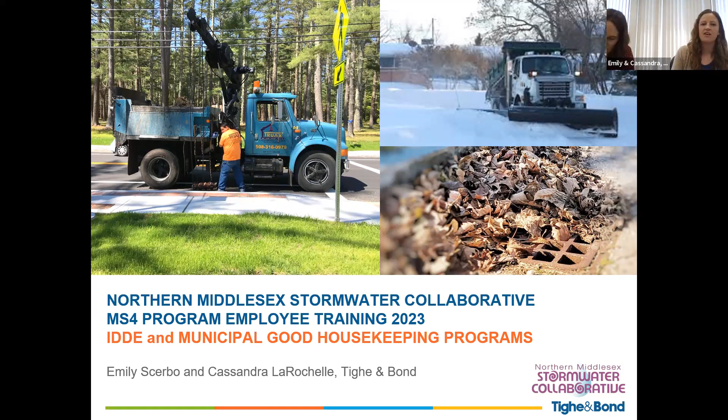Today we will be talking through both the illicit discharge detection and elimination and municipal good housekeeping programs. We want to make sure that you are hitting that permit year 5 annual employee training box as well in the annual report, so please remember to use that sign-in link that Daniela sent in the chat.

Other items we'll be touching on are pollution prevention within municipal good housekeeping and municipal operations, and then we'll be taking a look ahead a few months at the annual report that is due at the end of September this year.

The first few slides, I'm sure you are all familiar with the program at this point, so I'll jump through pretty quickly, but let me know if you have any questions as I go.

As you're aware, the permit is broken out into six minimum control measures, with the added bonus of the TMDLs and impaired water body requirements. Today we will be covering our MCM 3 and 6 training requirement.

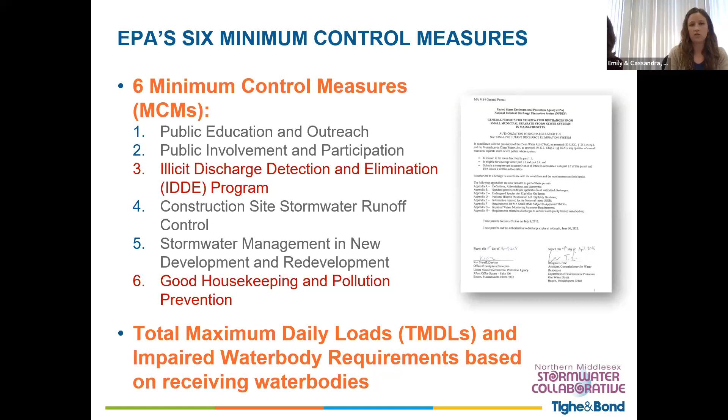To kick us off with the IDDE program, we're going to be talking about how to identify illicit discharges, and some specific examples for catchment investigations and wet weather screening.

To the basics of illicit discharges: really it's anything that discharges to the drainage system, to the MS4, that is not composed entirely of stormwater. There are some indirect discharges that are more overland or via groundwater. There can be piped direct connections, such as actual sewer connections, or laundry, things of that nature.

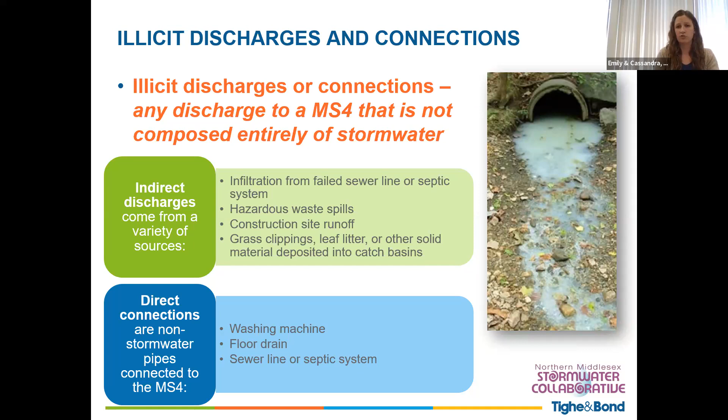The exceptions there are the allowable non-stormwater discharges: flows from firefighting, routine water system operations and maintenance with flushing, dechlorinated swimming pool water, and others listed here.

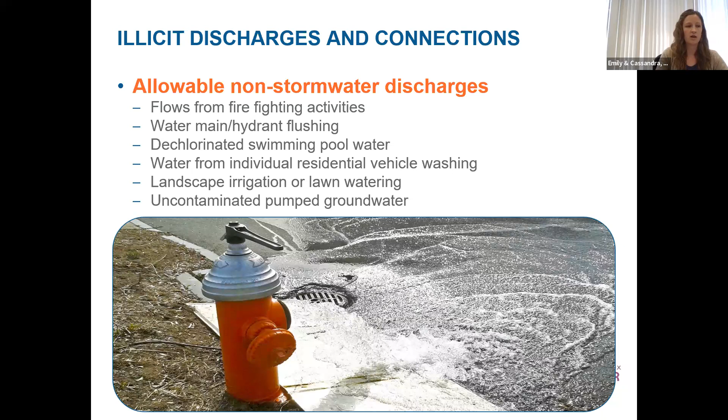What we really want to dig into is, if you're out in the field, what are you seeing, and how are you identifying an illicit discharge or an illicit connection?

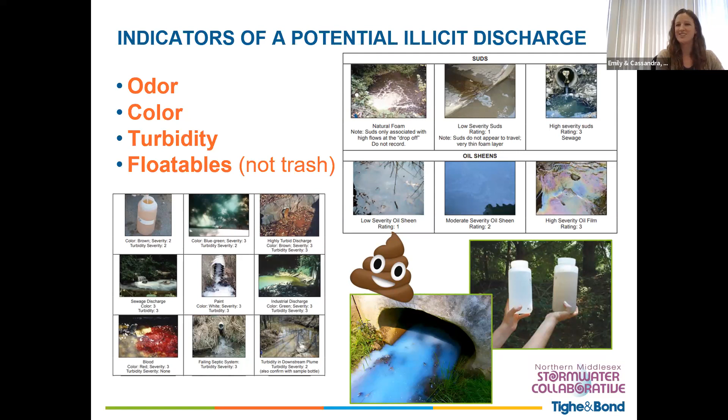Some of the key indicators we're going to be talking about: if there's an odor, it can run the gamut, like a sewer odor or something along those lines. There can be color in the water if it's more turbid, or if there are floatables—and we're not talking about just trash and garbage there. If there's floatables, that's a clear indicator of an illicit discharge in the drainage system.

If you are seeing something that might be an indicator, it should be reported, and depending on the level of risk to public health and safety, there are different methods and ways that you should be reporting this, depending on what the illicit discharge is and the impact it might have.

Reporting is critical. Municipalities can be audited. EPA, even in the annual reports every year, wants to know when the illicit discharge was found, what the response was, when it was eliminated, and how you confirmed that it was truly fixed.

Due to the wide range of illicit discharges, the appropriate authorities—internal in your municipality and external as well—can vary. We didn't want to try to cover every scenario here, but your illicit discharge, your IDDE plan, the written plan, should have a statement of responsibility that outlines the appropriate response procedures for different types of illicit discharges within your community.

So that is our high level overview of the background.

Right now, this is the framework of the illicit discharge detection and elimination program. It follows the framework set out in the general permit. Right now we are nearing the end of permit year 5, and we're in the middle of catchment investigations and mapping updates of your GIS, as well as wet weather screening of outfalls.

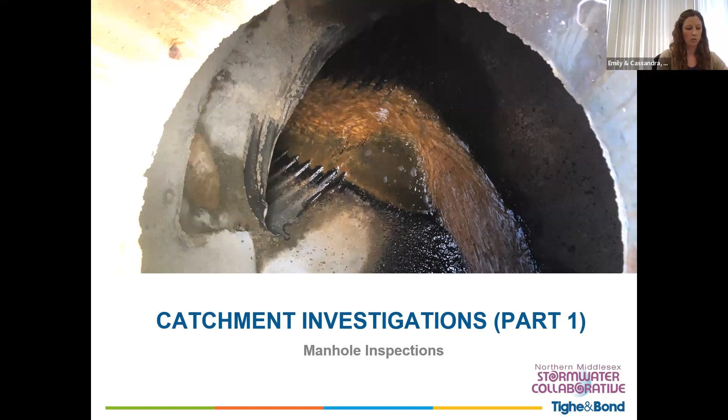To start from the beginning, to define catchment: it's basically the land area that drains to an individual outfall or interconnection. We are making observations, sampling, and looking in drainage structures during dry weather to determine if there is an illicit discharge, to try to basically hunt down the source of that illicit discharge located between two structures, to determine where the illicit connection might be coming from and proceed to eliminate it.

EPA's MS4 requirement is that all catchments with junction structures must be investigated during dry weather, no matter what. So you have to go into the system upstream of the outfall and open key junction structures. I will define junction and key junction shortly. But for catchments that don't have any junction structures—if you have a catch basin that crosses the street and outlets—the dry weather screening effort completed at the outfall does meet that sampling requirement, the manhole inspection requirement.

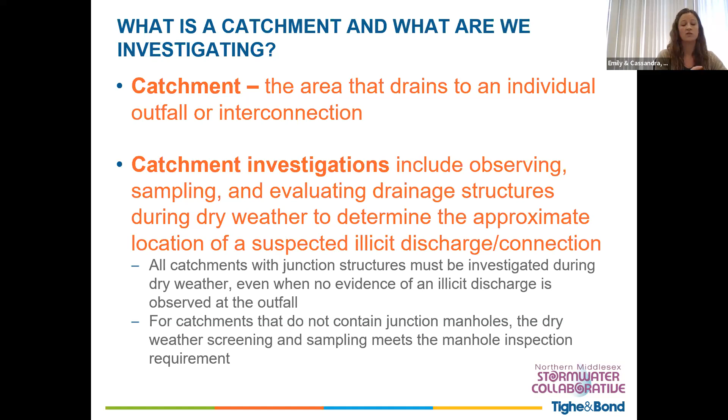Now, as promised, some background on the junction and key junction manhole definitions. Junction manholes are essentially a structure with more than one pipe entering the structure, unless it is from a private storm drain or a single catch basin. In that case, it wouldn't trigger it into being a junction manhole.

A key junction manhole is a junction structure that can represent one or more junction structures. So really what this means is we look for those structures that have multiple inlets, identify that as a junction structure, and try to make the determination on which one is the best one to open, so that if there is dry weather flow, you can best track that flow up into the system.

You can have more than one key junction structure, and it might not be a manhole—so I'm going to use those terms interchangeably here: key junction manhole, key junction structure. Sometimes they're catch basins; it just depends on how the network of piping is mapped.

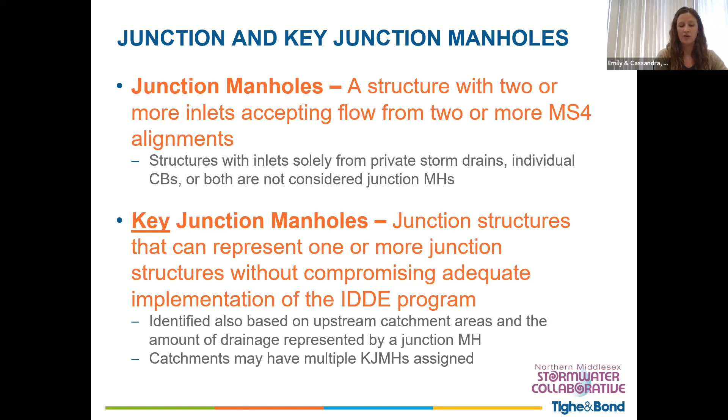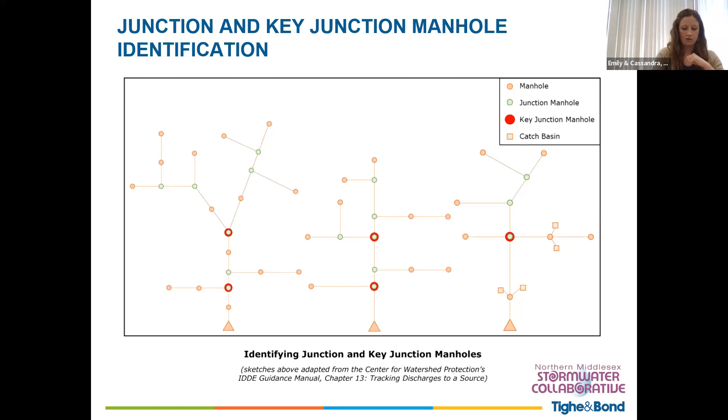When you are going into the system and opening the junction structures, there are a few items you have to tackle while you're there. Ultimately, you are looking for evidence of dry weather flow, which could be an indicator of an illicit discharge or an illicit connection. You are screening for visual or olfactory evidence of an illicit discharge.

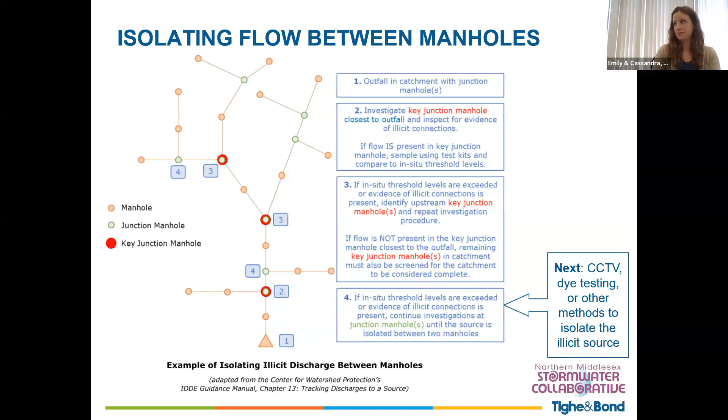We typically go downstream to upstream a lot of times because mapping isn't perfect at this point, so we find it's easier to trace that way. But when mapping is more refined, you can go from the top of the catchment down, and sometimes that's more efficient if, say, higher up in the catchment you identify an illicit discharge, you could stop looking downstream because you've already found something. You would maybe only hit the key junction manholes at that point, looking for order of magnitude increases or decreases, and then you'd have to revisit that catchment. I don't know if that makes sense.

People have different preferences for how they like to tackle the catchment area. Any questions on that at this point?

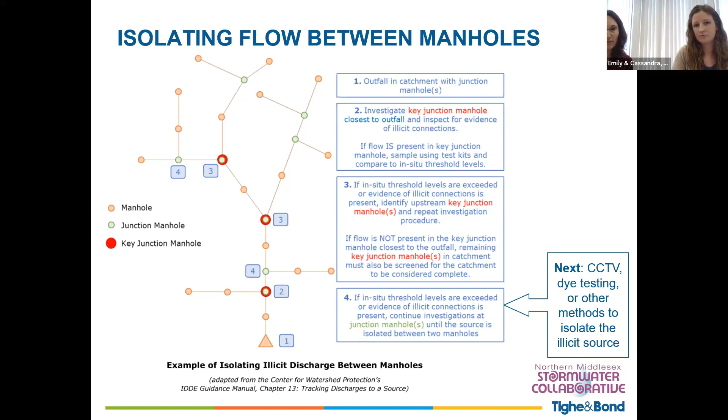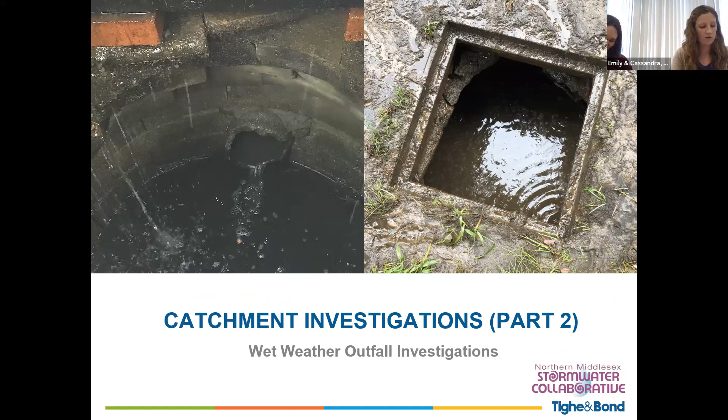Part 2 of the overall catchment investigation program is wet weather outfall investigations. The permit defines this requirement as all outfalls located within a catchment that has at least one system vulnerability factor, an SVF, essentially an indicator that there might be a higher chance of a sewer input in that catchment area to the drainage system.

For all catchment areas with one or more SVF, you have to complete the wet weather sampling. The SVFs are listed for your information, and that's something that gets screened before going into the field for wet weather. So you don't have to go to every outfall for wet weather like you did in dry weather.

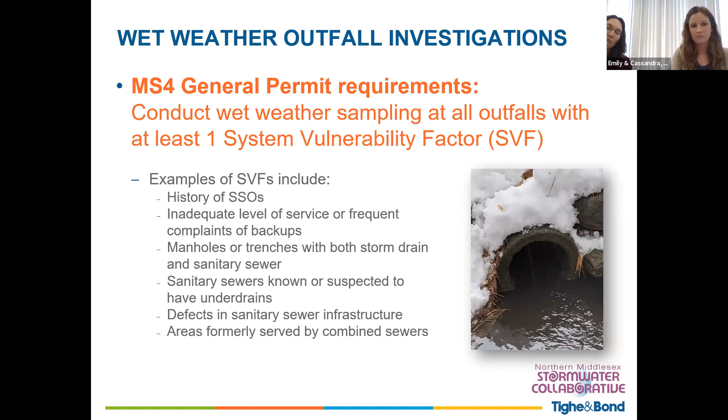When going out to do the sampling, EPA and the general permit don't specifically call out a rainfall event's depth or duration, but they want sufficient depth or intensity so there's an active stormwater discharge occurring. They recommend sampling in spring when groundwater levels are high, but also avoiding the first flush, so you're not getting elevated levels you wouldn't normally see during a rainstorm coming off the roadway.

For the actual sampling effort, the procedure, sampling requirements, and laboratory sampling are all the same as for dry weather at that outfall. So there's no changes there, you just have a lot of extra rain gear.

Any questions on wet weather? Okay.

I want to go through a couple of examples, and these streets might be familiar to a few of you, so thank you for allowing us to use your examples, with a couple of what-would-you-do scenarios here.

There's no penalty for wrong guesses. It's true, and unfortunately I don't have candy to throw at you since we're not in person if you get it right, but I'd appreciate any thoughts in the chat about what you would do if you were in the field here. Celia raised 3 fingers.

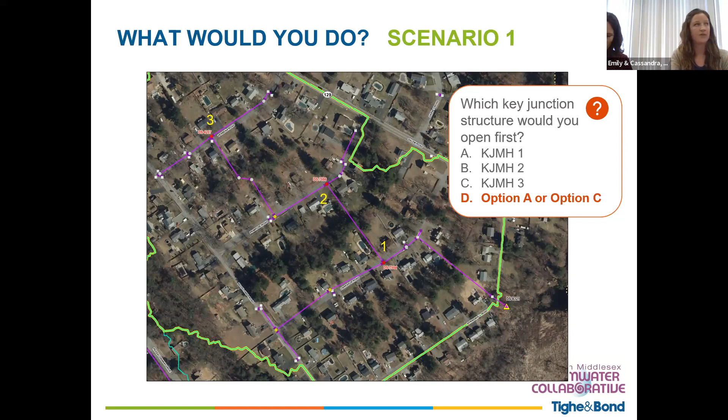Goodness. Okay, so in this scenario, each of the key junction structures was opened. It was screened for dry weather flow and indicators of an illicit discharge. No flow was found, no indicators were found, so this portion of the catchment investigations can be considered complete. It was a pretty simple one, all things considered.

We did also take the opportunity to try to identify any unknown pipes in the mapping or update the GIS while we were out there and had structures open, because the other kind of hand of the catchment investigations is that EPA does want to see continued updates of the mapping by year. I think the schedules kind of coincide that as catchment investigations complete, the GIS mapping should be as complete as possible as well.

So we took a last look at how we have been approaching the catchment investigations to date. We will also take a look at the most upstream terminal structures at the limits of the catchment area, like the headwaters of the catchment, just to confirm that there's no additional unmapped drainage that would expand the catchment. So for example, in this situation, we also were able to figure out some connectivity of the catch basin there, that it actually did connect into the catchment.

All right, so scenario 1. Scenario 2 ended up being a little bit more complicated, a little bit bigger. There's more streets involved. So in this situation, excuse me, the field crew opened up the most downstream structure. Again, that's how we have chosen so far to implement the procedure.

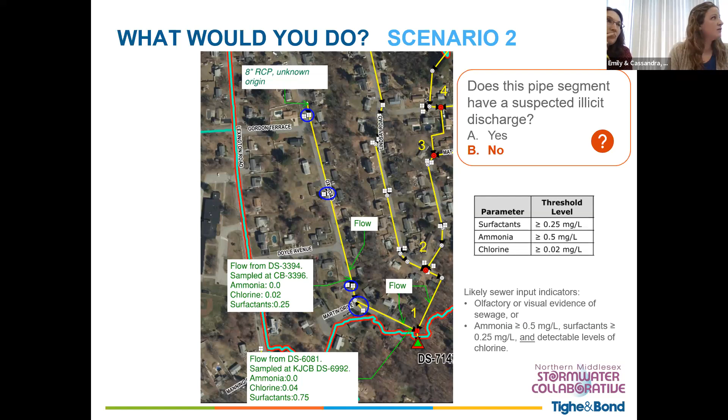All right. So to reorient you again, we had flow at both inlet pipes. We went down the left side from junction manhole number 1. Now I'm going to take you down the right side.

Okay, so we traced the flow upstream. For the right branch, we sampled at the next upstream key junction structure, number 2 there. And this structure also had flow from multiple inlets. So both were sampled. Flow from the left had results that were below benchmarks.

And again, because of what we've talked about, that was considered to be complete at that time. For the results from the right, they're a little bit more elevated still, and it's similar to the downstream results. So it's more likely that the flow that had the hits would have been coming from that branch.

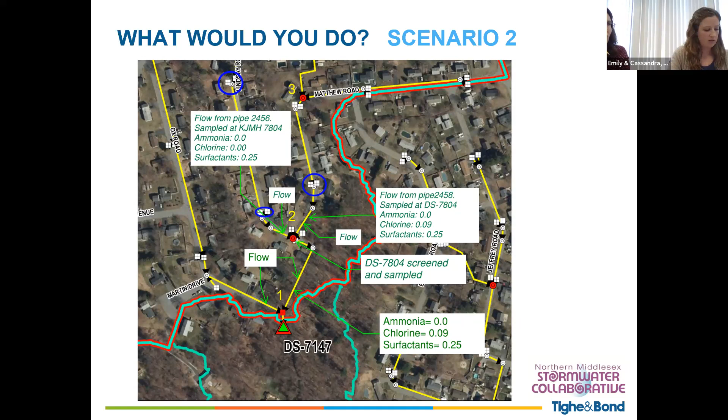So to reorient you again, we just continued upstream to the next junction structure, going to number 3. And this next slide covers kind of a bigger area, so bear with me. If you have questions about any areas that I'm talking about, please let me know.

So we opened the next key junction structure, number 3, and again, both inlets had flow. As you can see in the test kit results, the combination of parameters doesn't meet the likely sewer input indicators, where the combo.

So we continued to trace the flow upstream, and the last step is to open the remaining key junction structures. So key junction manhole number 4 did have the combination of results that, again, doesn't exactly meet EPA's criteria for the likely sewer input.

And then going up towards key junction manhole number 5, which is offset a little bit, there was no flow. So that helps you kind of narrow down the flow to where it might be coming from.

It's possible it could be capturing some stream flow. It could be capturing low levels of things happening in the neighborhood. It's a big neighborhood and it's capturing a lot of drainage and runoff.

The other thing I want to note, you may have noticed throughout this case study that there are low levels of surfactants detected in pretty much all of the structures. In case you haven't seen it, the surfactants test kit is a visual color wheel and it can be somewhat subjective. So often we'll take a conservative approach of rounding up, if you will, to the nearest 0.25 milligrams per liter, if the color appears to be kind of in between.

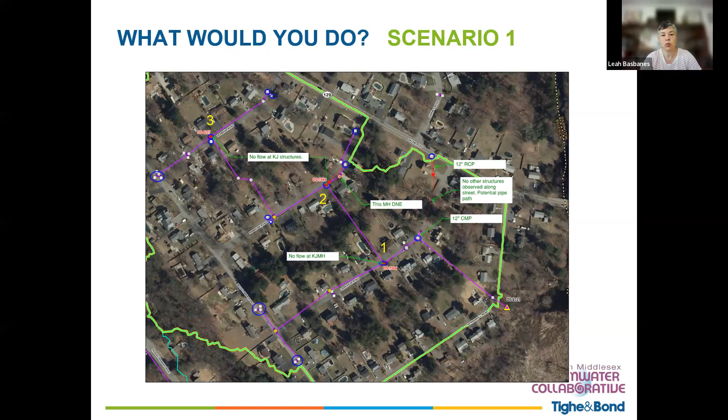So going back to scenario 1, even though it didn't have the 3 parameters that you're looking for, the fact that the furthest upstream area had an unknown connection - that wouldn't be the next scenario, but the first type, the one on the left. So the fact that at the very end of that there's an unknown connection, that wouldn't be a concern, even though you're not meeting the 3 parameters?

It is definitely something that we're trying to hunt down. And unfortunately, I don't have a real answer - it looks like we in the field did not figure that out for this street. You're correct, that is something that we would want to figure out with the overall mapping here.

See if I can scroll the right way. It does go to a cul-de-sac, so there is a chance that it could connect through, and that is something that we'd want to verify before we consider the whole thing complete.

Right, yes, because if it's an illicit connection, what gets put into that could change any day. So yeah, that's definitely a good point. So you wouldn't be considering that catchment 'complete' because we have an unmapped pipe. Right, yeah.

In this community, there are a lot of sump pump or roof leader connections. So it's always possible that a house is connected, which is something you would want to know. If it was laundry or sewer connected, you might not see evidence of illicit discharge at that time.

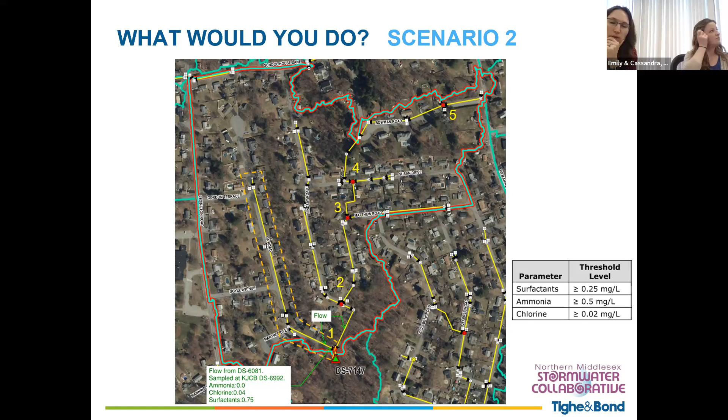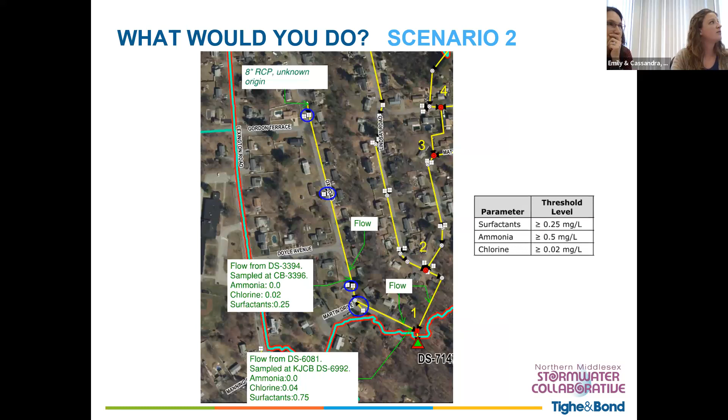Apologies for the screen flipping. These scenarios where you have all these low level, slight benchmark exceedances are difficult. We very rarely come up with something very obvious, it's a lot of this gray area.

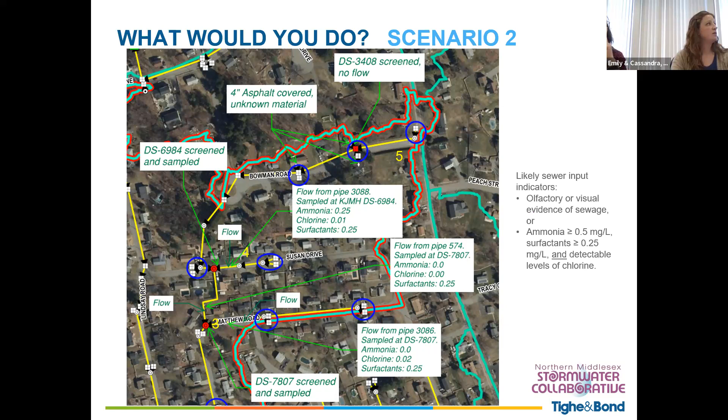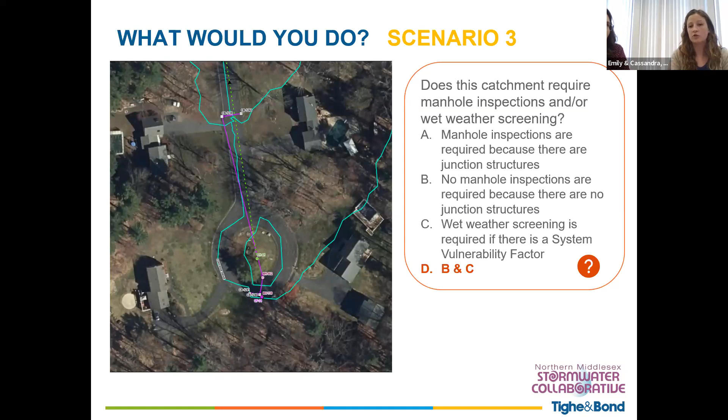So there's no junction structures because there's only one drain pipe entering each of the structures in the mapping. Because there's no junction structures in the catchment, dry weather screening at the outfall does meet that manhole inspection requirement. But the last check is whether this neighborhood has a system vulnerability factor that would require wet weather screening.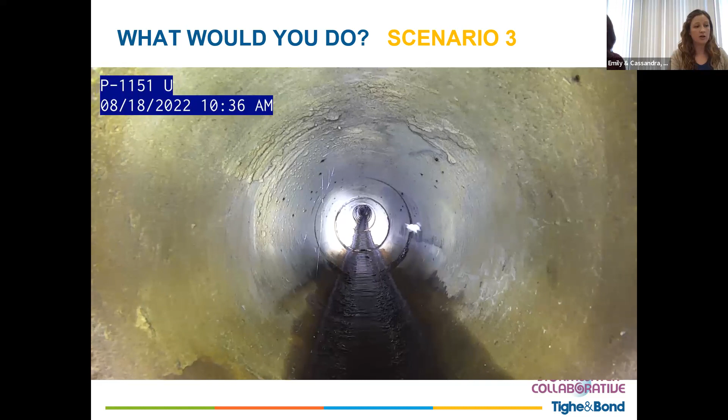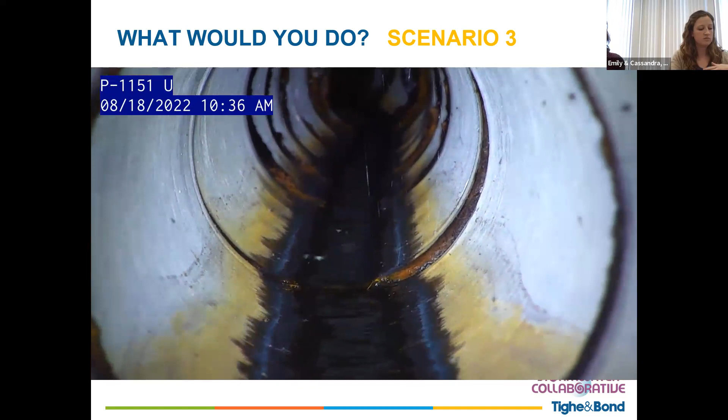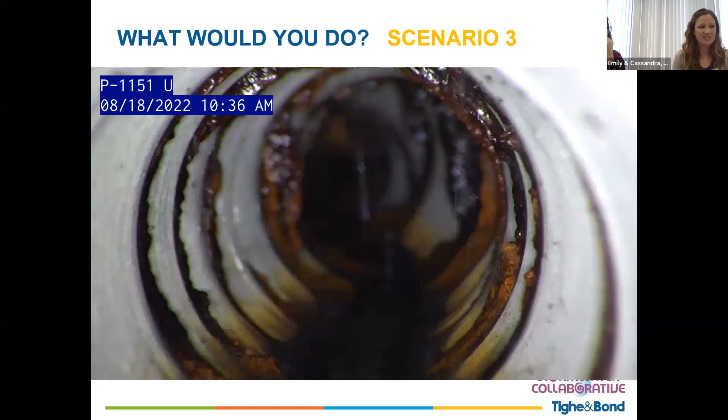When we were on site in this neighborhood for a non-MS4 project, we were doing a condition assessment of pipes with our quick view zoom camera, and we were seeing pretty significant orange brown sludge buildup at the pipe joints. This was coupled with some olfactory evidence, a bit of a smell at the ground level that was present during the inspection.

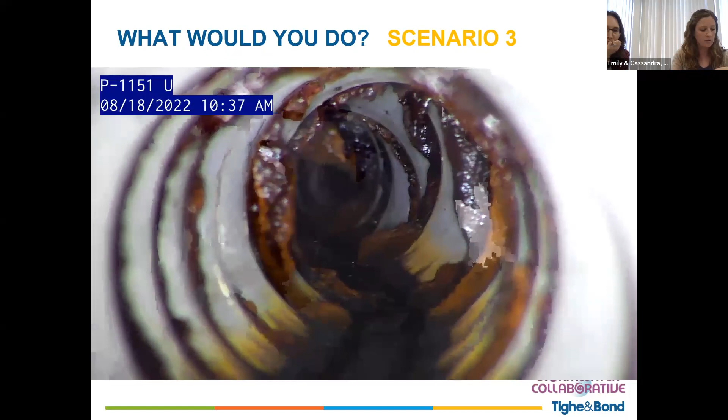Because of what we were seeing in the pipe and what we were smelling above ground, we wanted to complete some additional follow-up investigations. So in this scenario, we returned to the street to complete in situ water quality screening of the structures. When we did return, the smell at the street level was significantly reduced, but the water quality results pulled from the sump did support the thought that there might be something going on in the area.

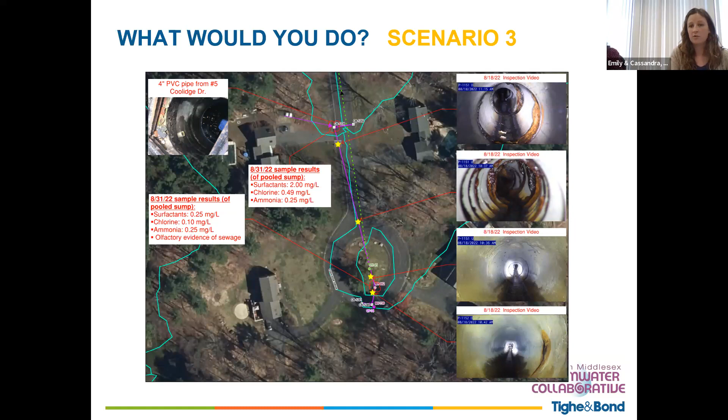But as I mentioned, the results were taken from the sump, so there was no flow present during the inspection, we just took a grab sample of the water in the sump. And with my last poll, I promise, what would you do in this situation? Would you do nothing because the results are not indicative of a sanitary sewer input? Would you send an enforcement letter? Or would you come back again to sample when there's actually dry weather flow?

I'm seeing a bunch of C's. Awesome, that is correct. So the samples taken from the sump did have elevated levels. So answer A was correct, incorrect, my goodness.

Before getting to enforcement, the source of the suspected illicit discharge should be isolated and confirmed. So we chose to return to the site because we were unsure of the source at this point, and we wanted to complete additional water quality analysis. You can also, as additional follow-up, complete more CCTV or do dye testing.

When we returned, dry weather flow was present. So we completed the typical suite of catchment investigations: ammonia, chlorine, and surfactants. We also took a bacteria sample. It's not an MS4 requirement, but we wanted that extra information about the actual flow in terms of bacteria.

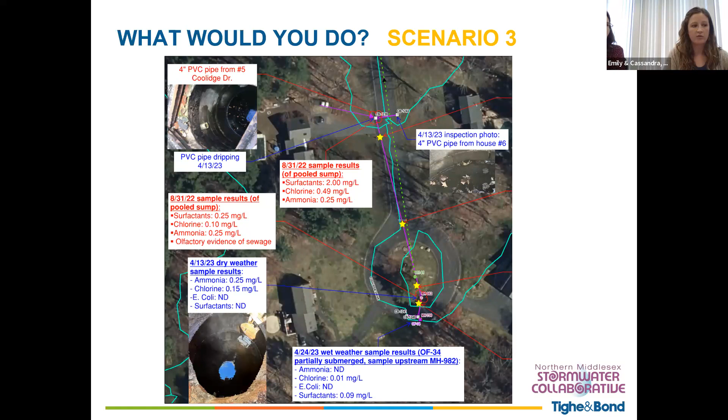So our current assumption in this scenario is that there was a buildup of naturally occurring iron ochre, iron bacteria, and that it could have been slowly building up over time in the pipe, coming in through the pipe joints of the drain.

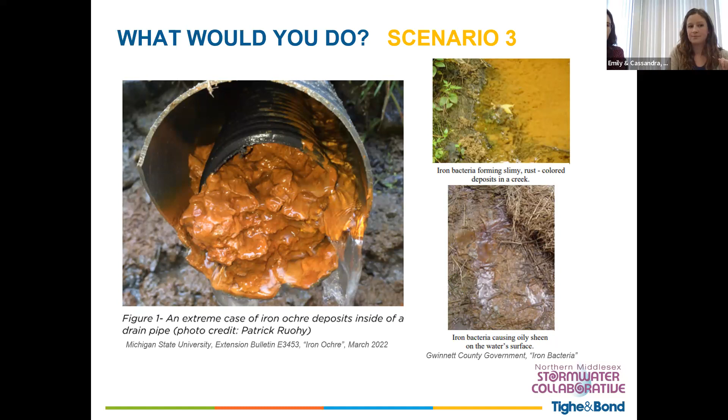So that is the end of my polls, my catchment investigation scenarios. Any questions on illicit discharges or the IDDE program as a whole, different scenarios you may have encountered in the field?

Okay, alright, thank you. How did I do? Your time is excellent.

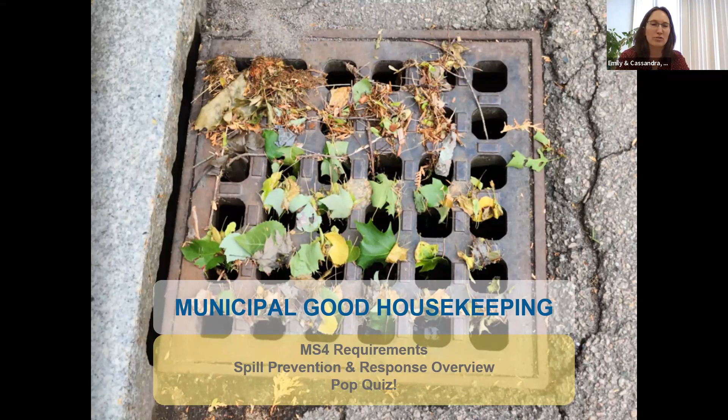Okay, so I'm going to talk a bit about municipal good housekeeping. Because we've gone through this material with you all every year for a while, I think there's a lot to review. We won't go through everything, but we're going to highlight some certain parts of this section of the program.

So just to start, really big picture: the municipal good housekeeping requirements have a goal of preventing or reducing pollutant runoff and protecting water quality from municipal operations. It does get muddy in the MS4 program between what you need to do to maintain your drainage system, and that is important, but really the overarching goal is still more about water quality. So it's just something to keep in mind.

Your major requirement under this section, MCM 6, is to create your operation and maintenance program, that written plan due in permit year 2. In that plan, you should have written O&M procedures for municipal activities, including standard operating procedures. You should have an inventory of your municipal facilities and vehicles, and have an understanding of what's going on at all of those sites, making the connection with SOPs.

One thing EPA has been asking in annual reports is if that's been updated. I think it's worthwhile, if you haven't done this already or aren't doing it annually, to go through and make sure your inventory of facilities hasn't changed. Are all those properties still accurate and under municipal ownership? Do you know what's happening on the sites? Has anything changed, have you added any oil storage? Make sure you've got all the applicable SOPs connected with each facility, throw an updated vehicle inventory into the plan, and then you can say that's been updated. This program requires all of that record keeping and putting it into the annual report, as I mentioned.

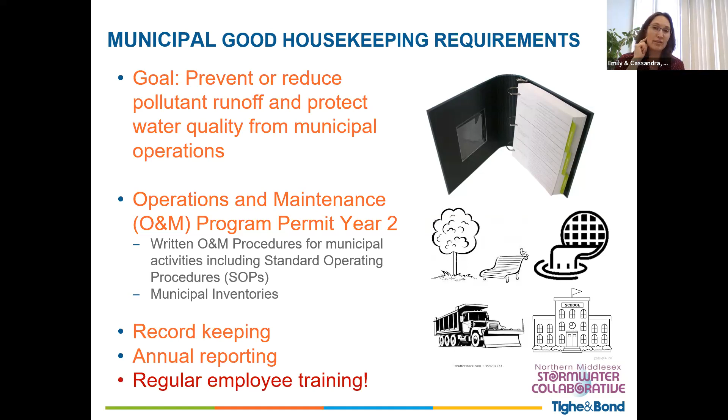So in addition to the O&M plan, some municipalities - actually I would say most municipalities - are also required to develop stormwater pollution prevention plans for individual facilities. This is required for anything like a maintenance garage, public works yards, transfer stations, and other waste handling facilities where pollutants are exposed to stormwater. So that's an important piece of it.

The SWPPP is not required if one of those sites already has an individual NPDES permit for industrial activities. So that comes into play for something like a transfer station or a wastewater treatment facility.

And then just want to mention that quarterly site inspections are required. We're not really going to go into this in depth, but EPA is looking for you to be doing those, have that documented four times a year. They're asking on the annual report how many SWPPP inspections happened, and one of those inspections should happen during a rainstorm. I feel like everyone puts off that rainy day inspection till the end. So you've got another - is there a week left? Yeah, a week left to do another inspection.

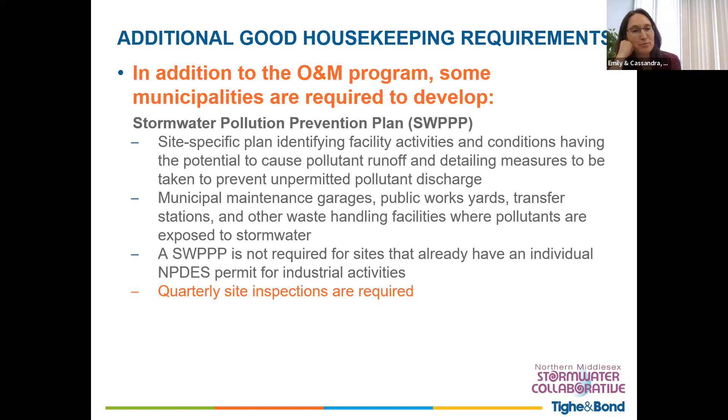Communities need to register with the Massachusetts State Emergency Response Commission if you are required to do tier 2 reporting. That's applicable to facilities that store 10,000 pounds of a hazardous chemical or 500 pounds of an extremely hazardous chemical, and that's all defined if you go to that link. So oil, fuel, diesel, salt, sand, and many more materials count towards those amounts.

So if your facility in general is subject to an oil SPCC plan, tier 2 is likely applicable. That's something we just want to give you information and some links about. If you have questions about that, I can connect you with Tim. Just want to have it on your radar.

For the oil spill prevention, control, and countermeasure, or SPCC plan, that I just mentioned, it's very common as we're writing original SWPPPs for people, we're asking questions and finding out, oh, you also need an SPCC plan because you have combined above ground storage greater than 1,320 gallons of oil. That's something that needs to be updated every 5 years.

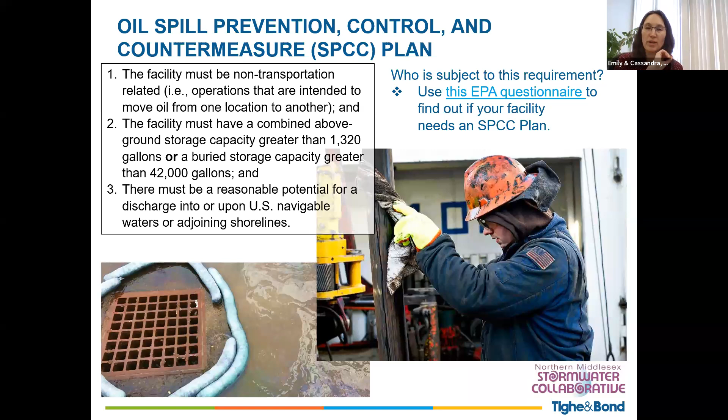As you're thinking about whether you have that much oil on site, oil is fairly broadly defined. What we typically think of is petroleum-based oils, diesel fuel, gasoline, etc. But oil-containing products also count, and it's your storage capacity, not just the amount you have. There are even some non-petroleum based oils like animal-based oils, vegetable oil, biofuel. It all counts towards that quantity.

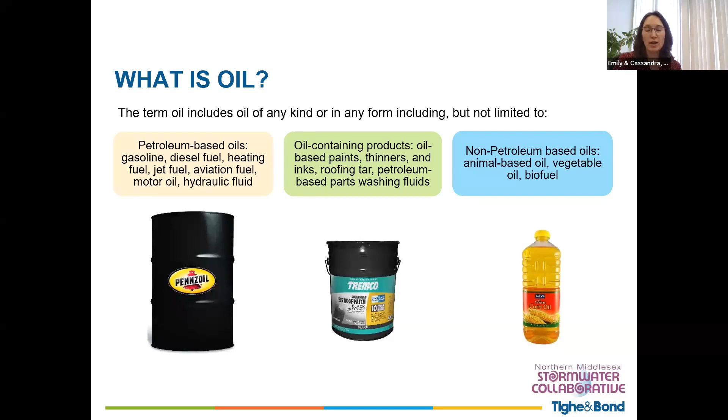Covered under both the MS4 program and the SPCC requirements is spill response. It's a very important part of your SWPPPs and your good housekeeping program. This is more of an emergency situation, so it's not going to happen often, but when it does, you need to be prepared. Working from left to right, the first step in your spill response is providing site control, keeping everyone on site safe, preventing people, cars, etc. from disturbing the spill area.

Then you're going to contain and curtail, stopping that release from happening and beginning containment. Then you initiate your regulatory notifications - we have a slide about that later about who needs to be notified. But certainly if you have an SPCC plan, your SPCC coordinator is going to start handling this, and also notify your cleanup contractor.

Then you're going to clean up only after you have regulatory approval. In Massachusetts, spilled oil is a hazardous waste, so in most of these cases, your fire department is going to be involved for a hazardous waste cleanup.

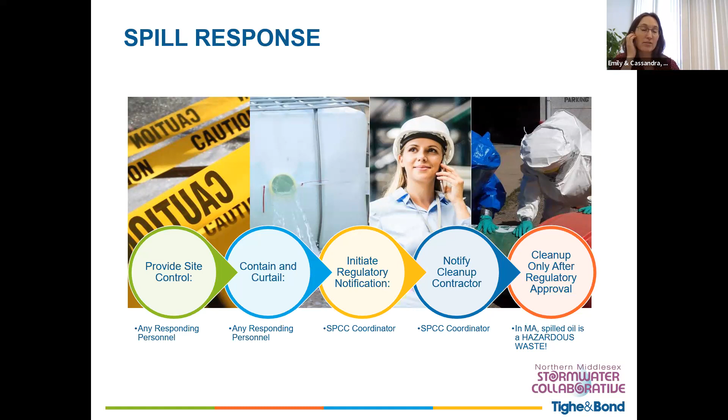Cassandra talked about the different types of illicit discharges and how there's all different ways to respond. An emergency spill is an illicit discharge. EPA has an expectation that you are tracking it as such, even though it's really a completely different procedure than, say, an SSO, or if you encounter sanitary wastewater at the end of a pipe. So for the annual report, when you're counting the number of illicit discharges identified and corrected, these would all count if you had a spill.

So one thing to look at often is, are your spill kits near any of your fuel storage or fuel pumps, and are they stocked? So anytime I'm doing a SWPPP inspection, one of the first things I do is open the spill kit and make sure that it is fully stocked.

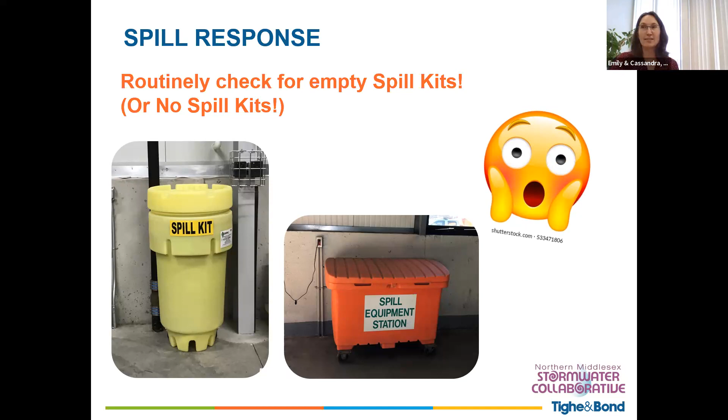If I can't see a spill kit, that really is just a huge red flag. Your spill kits can include any or all of these things: spill mats, gloves, absorbent booms, plastic bags, goggles, and loose material.

Yeah, and that should all be spelled out in detail in an SPCC plan, and most likely in your SWPPP as well.

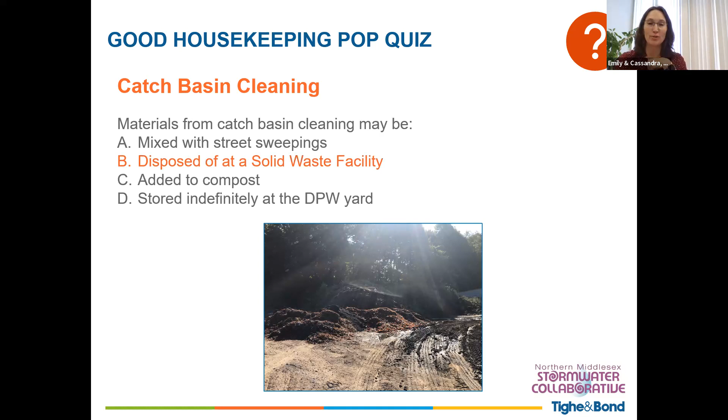Okay, so we have a lot of B's coming in. Tell them, Cassandra. Okay, the answer is B. Your catch basin cleaning material should be disposed of as solid waste. The only time you'd be able to mix it with your street sweepings is if you have a beneficial use determination to do something different with catch basin cleanings. They are solid waste.

Comment in the chat. So just some notes on catch basin cleaning. This can be done in-house or contracted. Catch basins must be cleaned to ensure sumps are not more than 50% full. In early iterations of the permit, EPA was specifying a number of times per year to clean catch basins, but there was pushback, so now it's more open-ended, but you have to track the percent full.

You have to ensure proper disposal or reuse according to Mass DEP policy. So you have a link here to the policy for catch basin cleanings. It is most often solid waste.

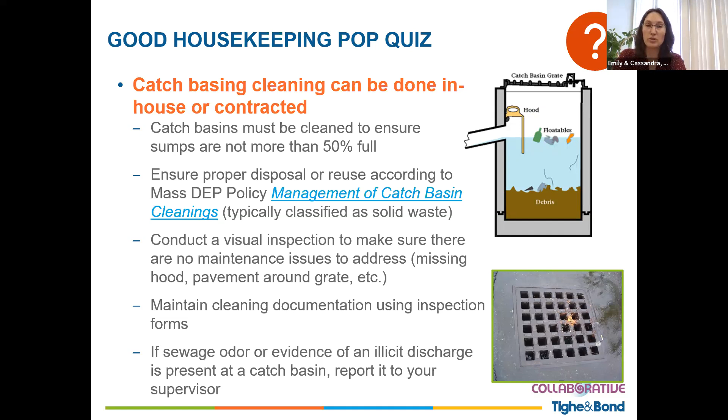When you're out doing the catch basin cleaning, you should also conduct a visual inspection to make sure there's no maintenance issues to address, like a missing hood, check the pavement around the grate, make sure everything's in good working condition. You should maintain your cleaning documentation using inspection forms, most typically happening electronically now with ArcGIS Online or PeopleGIS or a similar electronic form, on your phone or a tablet. And if sewage odor or evidence of an illicit discharge is present at the catch basin, it should be reported to a supervisor. Okay, go ahead.

All right, next question for you all. Street sweeping. According to Mass DEP, which of the following are true about storage of street sweepings? A, storage must be at a location such as the DPW yard that is under the control of the municipality. B, street sweepings shall be protected from wind and rain to the extent necessary to prevent dust, erosion and offsite migration. C, street sweepings shall not be stored within the 100-foot buffer zone of a wetland or within wetland resource areas. D, storage of the street sweepings must be temporary. Or E, all of the above.

All right, if that answer is coming in, keep them going, this is good. Everyone's picking E. E is correct. Okay, and you can go to the next slide.

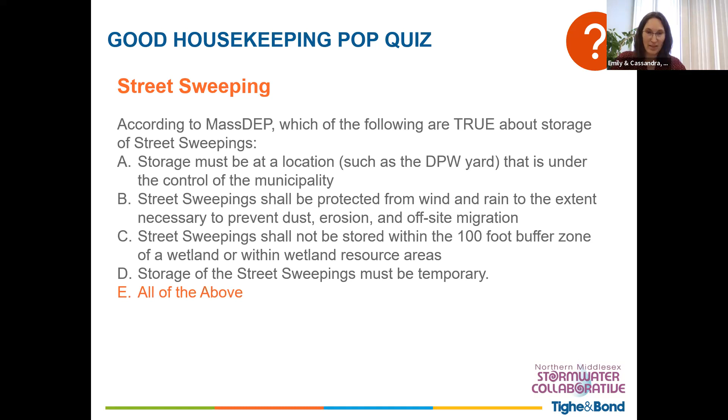So in the permit, you're required to sweep all municipally owned streets and parking lots at least once per year and maintain documentation that you're doing that, and ensure proper disposal or reuse according to DEP's policy.

So once a year doesn't sound so bad, but in a lot of cases there's an impairment or a TMDL requiring you to sweep twice a year in that watershed, or in some way increase the frequency. So if you have a nutrient impairment or TMDL, phosphorus or nitrogen, you're at a minimum sweeping twice, and Appendix H specifies spring and then fall after leaves have fallen off.

Leaves on pavement are proving to be pretty problematic in terms of phosphorus loading, so it's really important to get those up off the pavement. They say between September 1st and December 1st to do that second sweep. And if you have solids, oil, grease, or metals impairments or TMDLs, any drainage area with a high impervious area percentage, commercial or high density residential areas, they're looking for you to think about that and most likely increase sweeping in those areas as well.

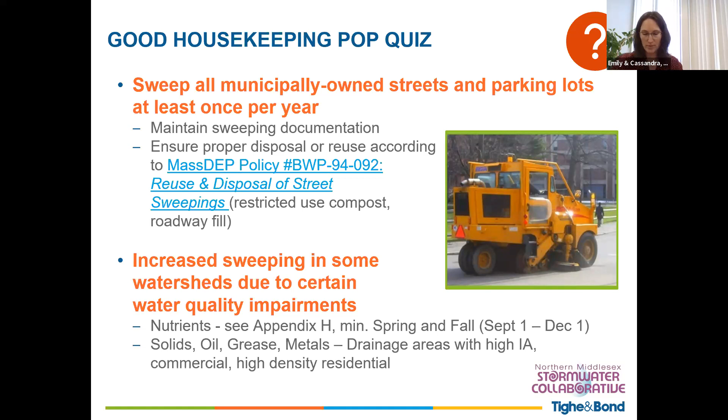Okay, next question. Snow stockpiling. When stockpiling snow, you should avoid these areas: A, paved areas. B, wetlands. C, stormwater BMPs. D, grass areas. E, only B and C. F, all of the above. Or G, none of the above.

Let's see what we think. Anybody have a guess on this one? All right, we've got some answers coming in. Got an E, an F, another E and an F.

Okay, the answer is E, only B and C. So we should be avoiding pushing any snow into wetlands and stormwater BMPs. It's fairly common, again, if we do SWPPP inspections in the spring when snow is melting, you can see where the BMPs are, and it's very often that's a place where you have space and the snow ends up going there. But then it takes all those pollutants and the sand and the trash and puts it into your stormwater BMP, and then you'll have to clean that back out. So it's a good idea to maybe mark that in the fall, stake off where your BMPs are so the snow is not pushed all the way right up against them.

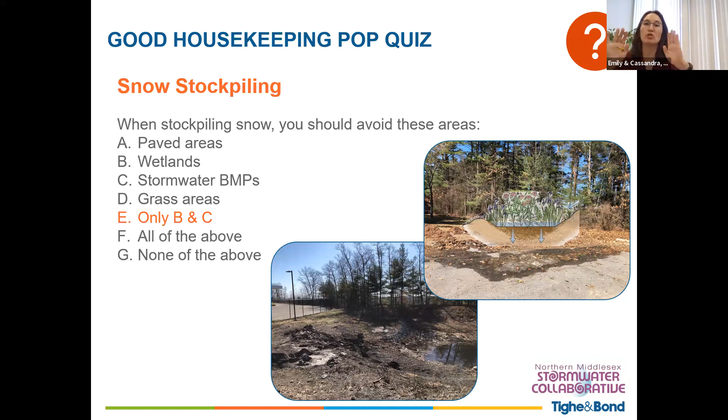Okay, next question. Floor drains. Your building floor drains are allowed to discharge to: A, the storm sewer. B, oil water separator. C, wetlands. D, sanitary sewer. E, a leach field. F, a tight tank. G, only B, D, and F. Or H, all of the above.

Okay, we have a lot of G coming in. The answer is G. So yes, your floor drains can be connected to an oil water separator that eventually goes to the sewer, the sanitary sewer, or a tight tank - that's fine. It absolutely cannot go to a leach field - that becomes a groundwater pollution problem. And definitely not the environment.

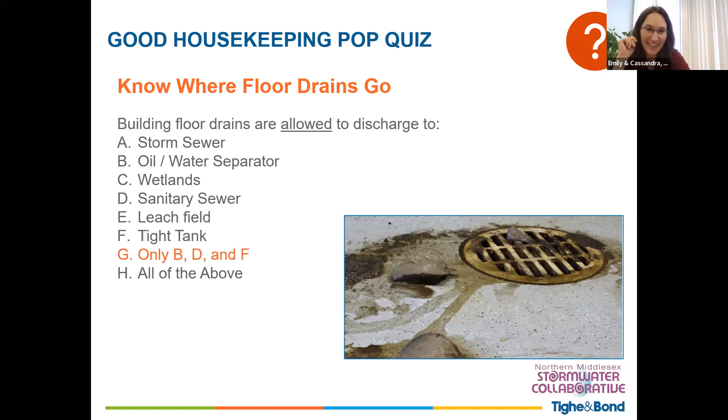This may seem silly at this point in the permit program, but if you haven't truly verified where your floor drains go, it's important to do that. There have been many times where we've been surprised that floor drains are actually connected to the environment or to the drainage system. In this particular case, no one thought this was going to the environment, but it said right on the grate that it drains to a waterway, and it in fact did drain to a waterway. So that's something that becomes a corrective action, and the clock starts ticking.

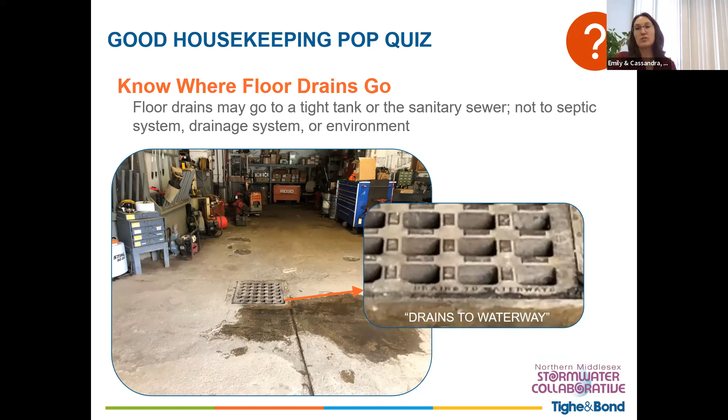Okay, vehicle washing question. Everybody loves to think about vehicle washing. True or false: you may wash municipal vehicles outside in the parking lot with a pressure washer or a little soap.

A lot of B answers. Anybody else? Okay, go ahead, Cassandra. It is B. It is false.

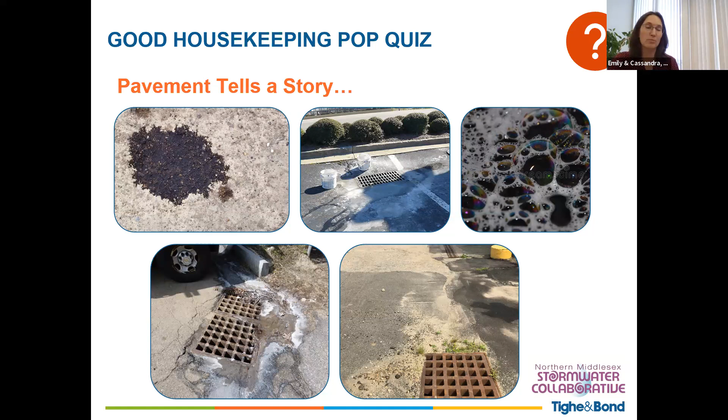Evidence that your salt pile is discharging from the shed into the drainage system - that's the picture on the bottom left. Any kind of erosion or sand, or if your stockpiles are not protected or not kept neatly in bins, and that is running into the drain, that can be problematic. Your DPW site or any facilities like that should be swept fairly often - what I'm hearing is every couple of weeks is a pretty typical frequency.

Another question for you, dumpsters. Which of these dumpsters appear to meet EPA's expectations for pollution prevention? You can put your guesses in the chat.

Got one guess. Anybody want to guess? We have two, we have a few votes for B. There is another one that I would consider good besides B. C. All right, let's give them the answer.

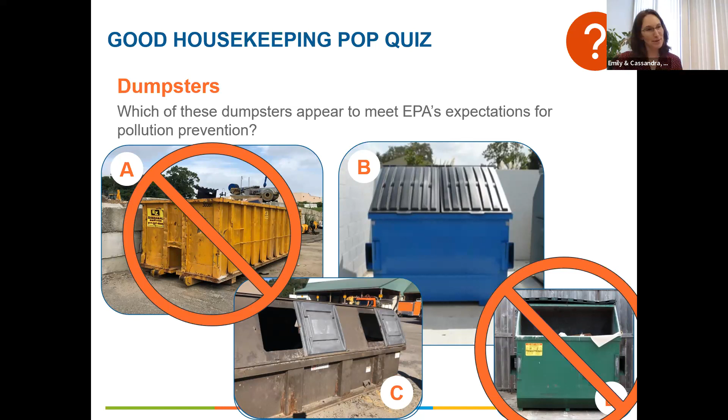B and C, but lids should be closed. Yes, that's exactly what I'm looking for - I think I explained this on the next page. Your dumpster should be in good condition, without holes, covered, away from catch basins or wetlands and waters if possible. I do think a lot of times the dumpster is at a low point, right next to a catch basin - it just seems like that's where they're placed. So it becomes even more important to make sure they are covered and intact, which can be difficult. We did have an EPA audit where they pointed out this particular dumpster you see on the page having a lot of holes in it. Then you're forced to talk to the vendor about getting a new rental dumpster, and it's just hard to find a lot of dumpsters that are in perfect condition.

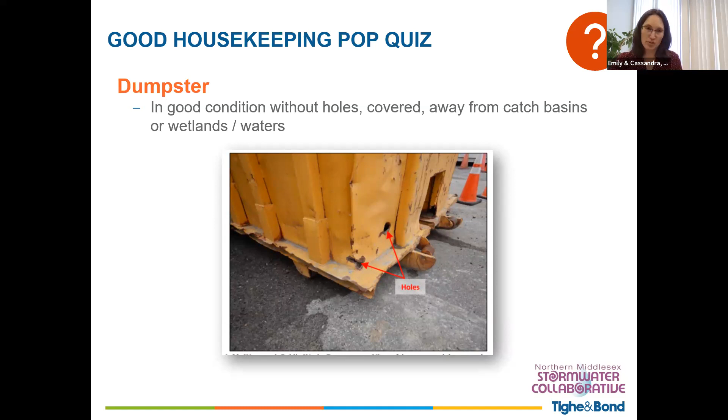Okay, I've got one guess, another one - give people another moment. Okay, so that is false. There are additional salt pile restrictions in water supply protection areas under 310 CMR 22, I think it's safe drinking water in Massachusetts, but EPA also requires all salt piles to be covered. I think it was due in permit year 1 under the MS4 program.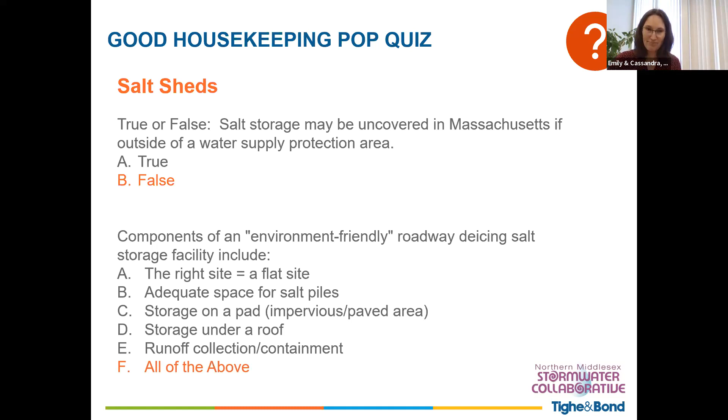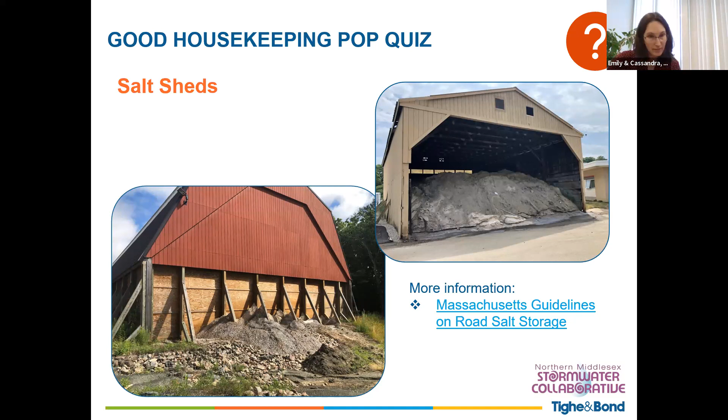And then the top right - it's important to keep, if you don't have doors (most don't), make sure you're not piling the salt too close to the edge. You want to keep salt behind your drip line. It'll be obvious in the rain - if you are too close to the drip line, you'll see the salt migrating. Sweep your loading and unloading area fairly frequently, especially during the winter time when you're using it.

Does anyone have any questions about all of that good housekeeping before I move on to the last bit? Don't see anything in the chat, don't see any hands raised, so I guess we'll keep going.

Okay, next up we're just going to give you - oh wait, hold on, how about salt piles for residents?

Smaller quantities. So to me, I think it partly falls outside of your purview under MS4 in terms of good housekeeping, but

It is an educational issue. Maybe especially for commercial areas, certain residents, or large condos, it's worth doing some education on how much salt they should be using. I do see excessive salt use in places like community colleges or strip malls. So it's definitely an education issue, and then if you're subject to a chloride TMDL, there could be more stringent requirements to get a handle on that, like private salt use.

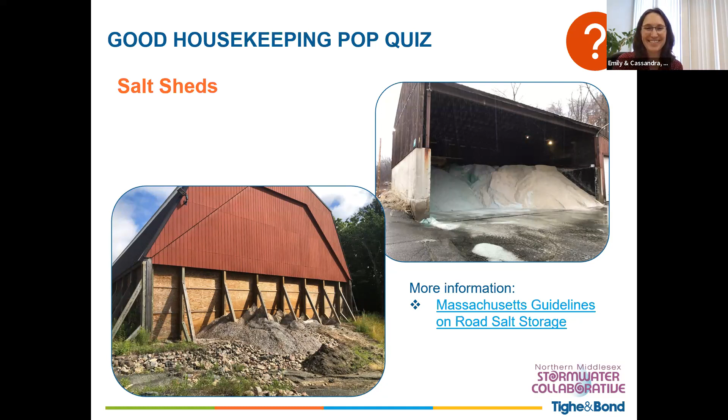Okay, all right. Okay. All right, now we'll keep going.

All right, annual report preview, just because September 28th is right around the corner in my mind.

IDDE program, again, same with the training, the outfall inventory, your updates to your inventory and priority ranking. So if you are doing catchment investigations and you have found new outfalls or decided some outfalls are not actually MS4 outfalls, any of those updates should be included with your annual report, including an updated prioritization. Is it high or low priority, what is its receiving water, and is there an associated TMDL or impairment?

That is important to keep those updates in the report. For catchment investigations, you are reporting on that, and EPA is typically asking what catchments are complete, a number and percent. So complete kind of goes back to Cassandra's examples. If you have anything left undone, like if you did the key junction manhole inspections but it has a system vulnerability factor and you didn't do the wet weather screening, it would not be complete yet. So that's okay, there's no... we're not at the timeline to finish all that by year 10, but I just wouldn't count some of those as complete at this point.

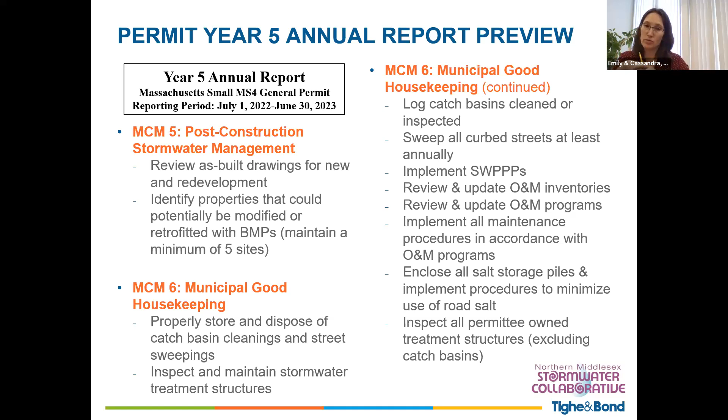And then it's the other annual requirements. It's a little bit pared down from 2003 permittees.

Okay, and then for the impaired waters and TMDLs, so everyone has some seasonal messaging if you have a nutrient impairment that you're supposed to be disseminating to different audiences. You should be tracking or estimating your BMP nutrient removal. So if you have a municipally owned stormwater BMP, having an inventory of how much pollution is being removed by that BMP. If you don't know, then you don't know - it's okay to say that you don't have that math done, but just keep that in the list.

And then completing lake and pond phosphorus control plans or other phosphorus plans - just the lakes and ponds. And then looking ahead to year 6, one of the bigger requirements is installing a demonstration BMP if you don't have a BMP that already counts towards that requirement. And that's for the nutrient related impaired waters and TMDLs, not just the retrofit.

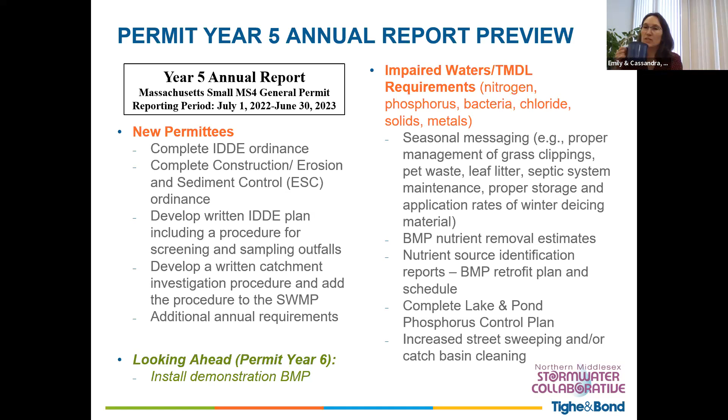Okay, so with that, turn it back over to Daniela to see if there's any additional questions.